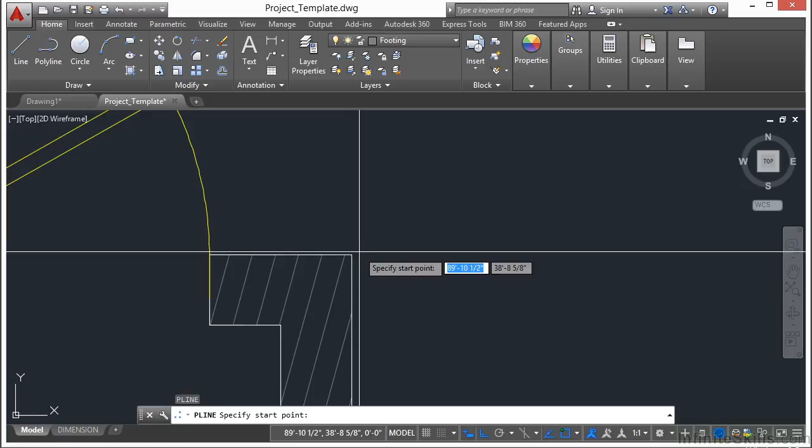Type in PL, press enter, and we're essentially just going to trace over the outline of our building. So start here, and then just snap to endpoints to our outside dimensions of our building. Another thing we could do is to just offset this outside line, but it's not a polyline right now. And then we would have to do a lot of joining and trimming. And so I feel that this is probably a simpler solution.

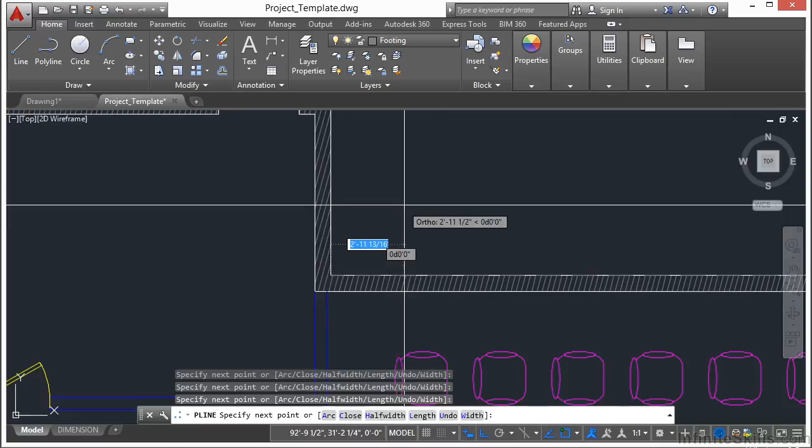Now, once you come up to this last end here, type in CL for close, and that will create a closed polyline. Now, our foundation only needs to come a few feet away from our building. So we're going to offset 2 feet, enter, select this line, and move it to the outside, press enter. Now, we don't need this line in here. Select it, right click, and erase.

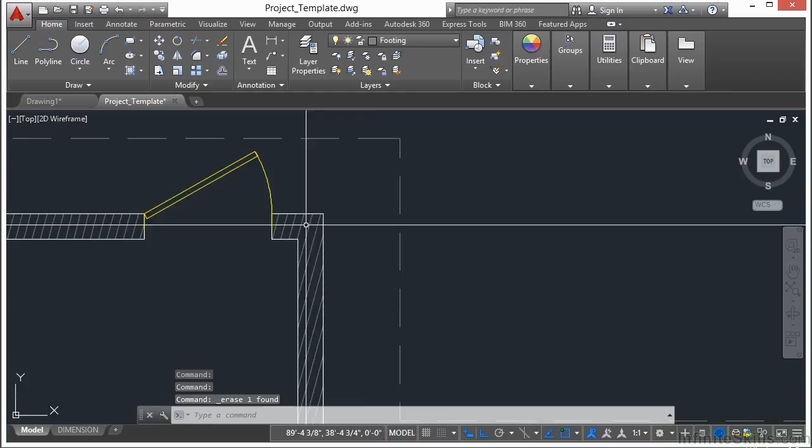So there's our building, and we have the outside line of a footing. We need that outside line because we don't want to plant over the top of it. So now that we have that, we need to create a pathway for our plants. So we need to be a couple of feet away from it. But before we start, let's switch to our plant layer. It's right there and it's red.

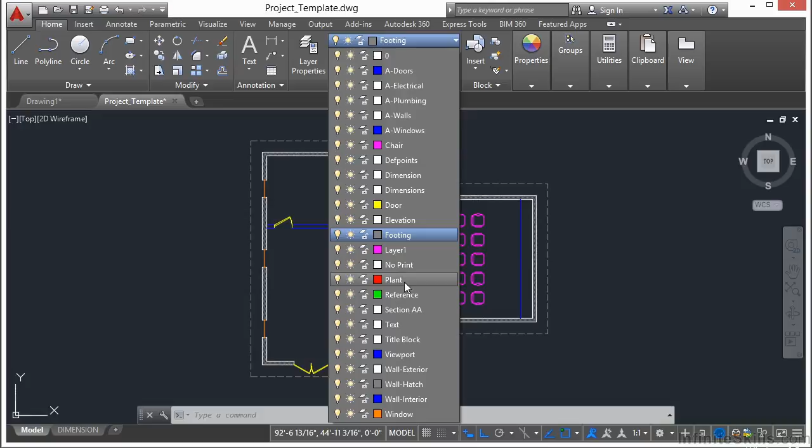Now we're going to offset. And this time, instead of typing in a distance, since we don't know what that distance is, we're going to offset through. So type in the letter T, press enter, select this line, and then drag it to here, and type in CEN for center, and select the center of that line. So this line that we just offset is going to be our array path.

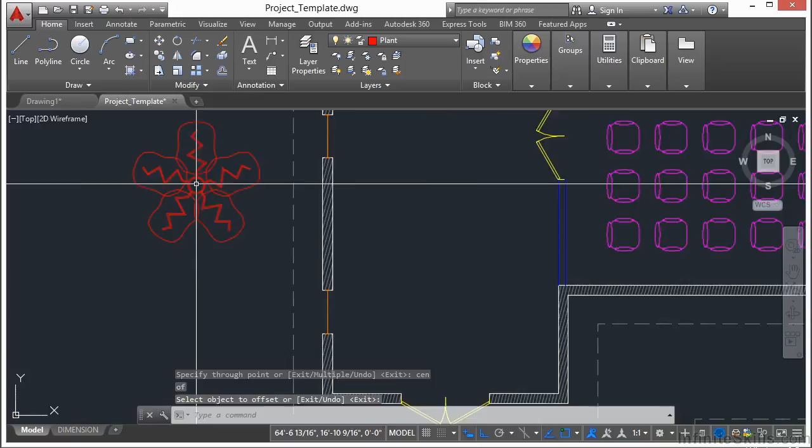Now I want to center this plant, so I'm using the move command. For my base point, typing in center, CEN, I'm going to grab the center of this plant. Now type in MID for mid. I want to put it right in the middle of this line here so that we know that this plant, the very first plant, is starting right in the middle of the building.

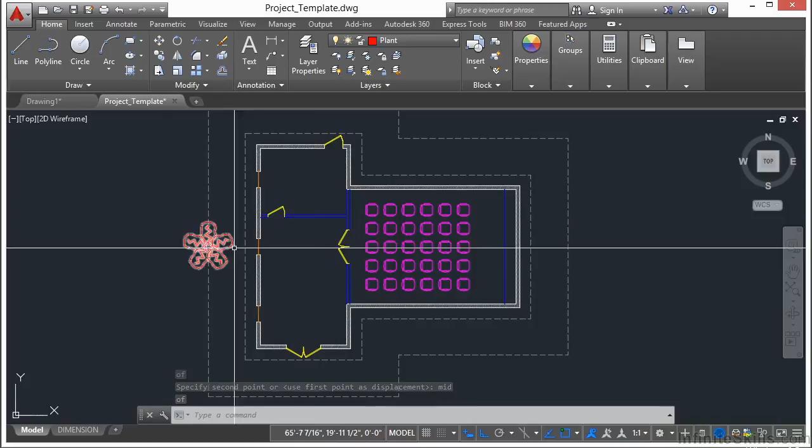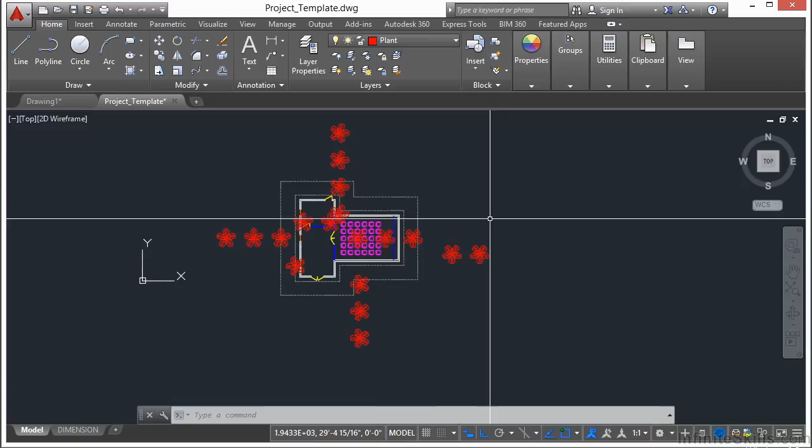So now we need to use the path array command. Select that command, start it, pick our plant, press return, pick our polyline here, and we get something really crazy. Now this happens sometimes with path array and closed polylines. Now it should work, but it happens so that it just gets caught in this loop that never ends and it doesn't know what to do with it. So if that happens, undo, and here's a little trick.

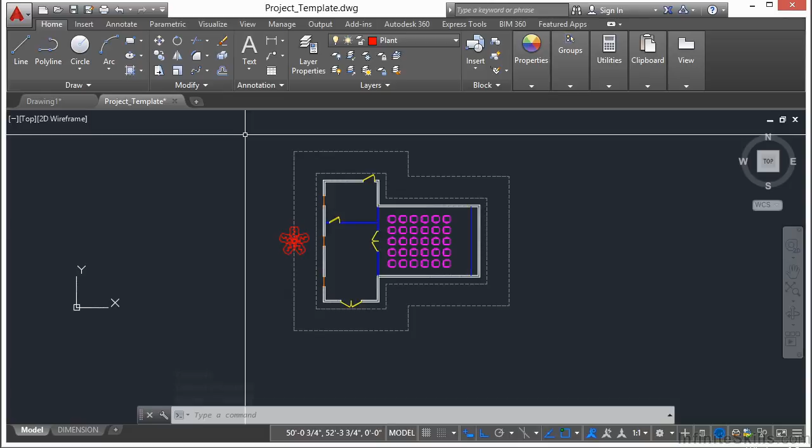Use the trim command, select the block, press return, and pick that line. We're going to break it. That's all we did. We just broke it. So now that closed polyline is no longer closed, but it has a start and a stop point. So that now AutoCAD can handle this. And that's okay. It's going to get us close enough to what we need.

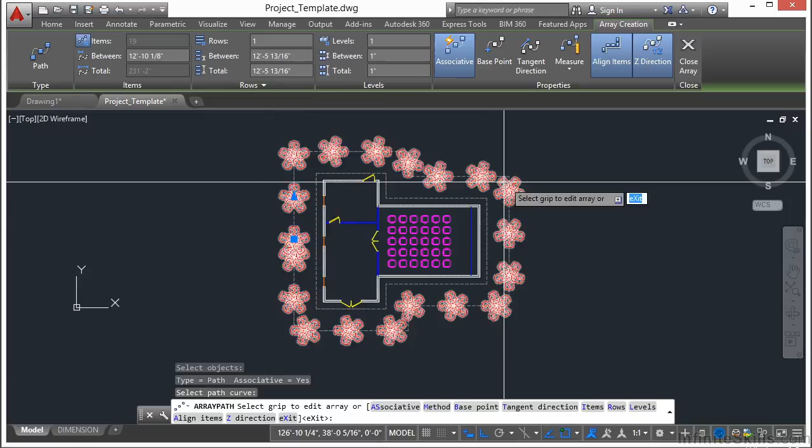So start the path array command again. Select your plant, press enter, select your pathway, and that's much better. Okay, let's say that's too many plants though. I don't like having that number of items. So we need to switch that from measure to divide. And now we can control how many items there are.

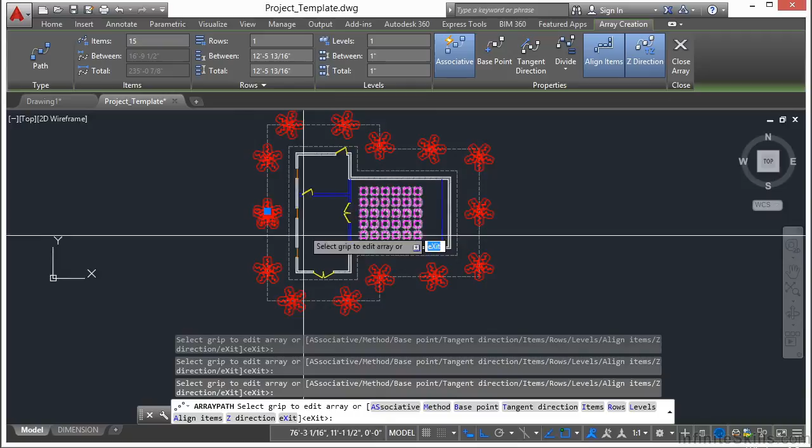Let's say 15. One of the things that it's doing is that it's putting one of these objects right at the very end, and it's kind of overlapping it. So that may be a problem you'll run into, but that's okay. We can deal with this. And this looks pretty good. It's very symmetrical. So I'm going to close array. Now I'm going to explode the array so that each one of these are individual items.

I'm going to come here to this bottom plant, right click, and erase. Now select the polyline, right click, and erase. Zoom extents, and here we go.

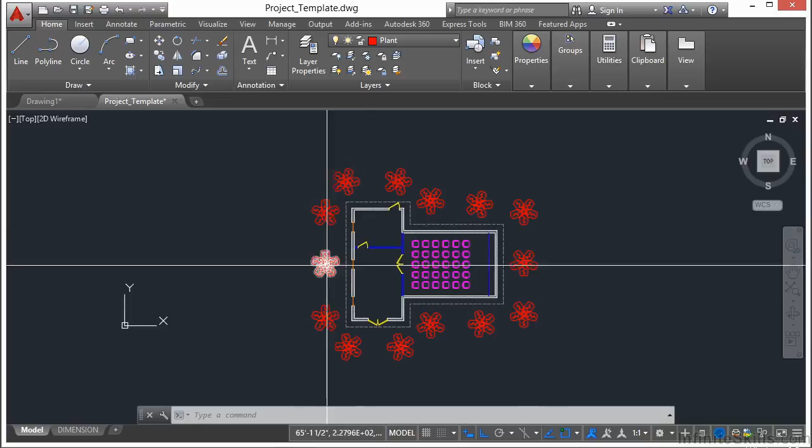So we have our building, we have our exterior walls, our doors, our windows, we've hatched the walls to better see them. We have our interior walls, a set of chairs, our foundation, and then plants that go all the way around. Now all we have left to do is to annotate and create our drawings. Our model is finished.